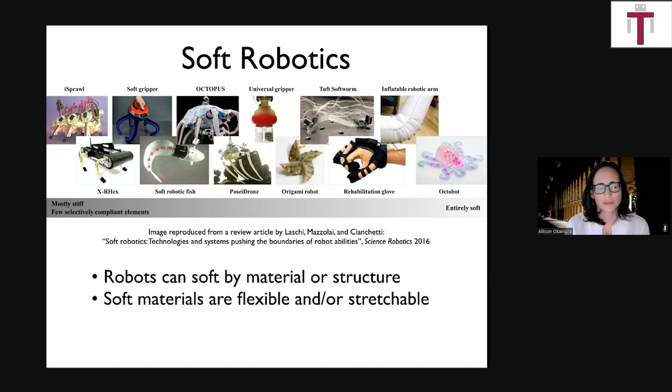Many of the robots shown in these images are made of elastomeric materials, which are highly stretchable, 300% or higher strain. But you can also have robots that are effectively made soft by their structure—long and thin, or having soft joints in specific locations. This gives a design space that is quite varied and complex to consider.

Another point is that soft materials can be flexible and/or stretchable. You can have materials that are quite flexible and bendable but don't stretch, and in fact most of the materials I'll be discussing today are in this class, whereas many soft robots are made out of stretchable elastomeric materials.

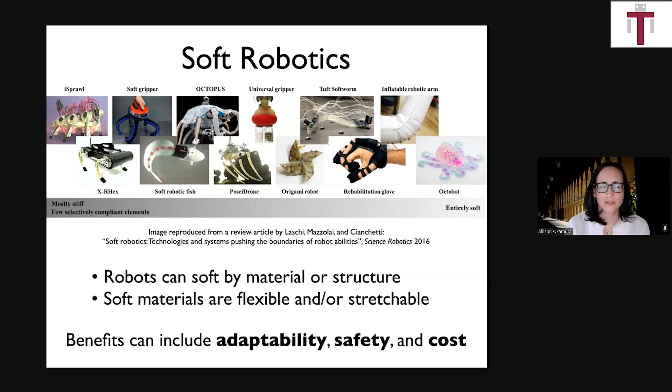The reason we'd like robots to have these soft features is adaptability to the environment—we get a lot of inspiration from biological systems, from plants to animals. There's also the potential for safety when interacting with people: a soft robot might be lighter weight, have lower inertia upon contact, and fewer sharp edges. Finally, though not always true, there's potential to reduce cost, which also relates to issues of accessibility I'll discuss at the end.

When we look at the advantages of hard versus soft robots and their fundamental structures—there are many types, but let's consider a traditional serial chain manipulator. In a hard robot, you have localized joints that can swing quite a bit in various directions, but stiff members, the linkages.

Soft robots tend to be more of a continuum nature—they curve over a large space, which can give challenges achieving particular workspaces with their tips, but allow them to navigate environments perhaps in a more elegant and smooth way than a traditional hard robot.

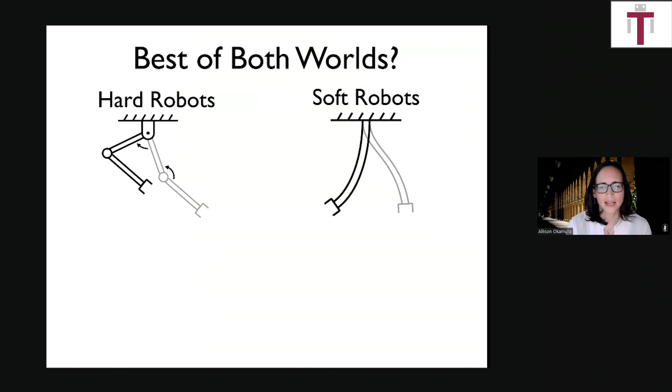The localized joints of hard robots allow sharp turns, letting them sometimes get to places a soft robot might not reach if it can't curve sharply at a particular location.

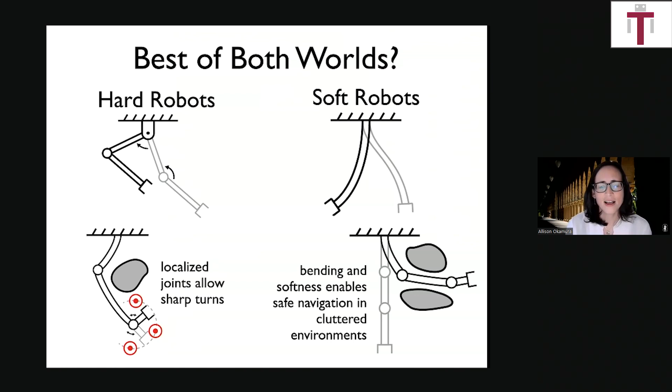On the other hand, the bending and softness of a soft robot allows navigation that is perhaps safer for both the robot and the environment when operating in cluttered areas.

Something I'd like to push towards the end of this talk, though not something we've fully achieved yet, is getting the best of both worlds by having soft continuum members along with localized joints where they're required. We're starting to see movement towards that in some more recent work.

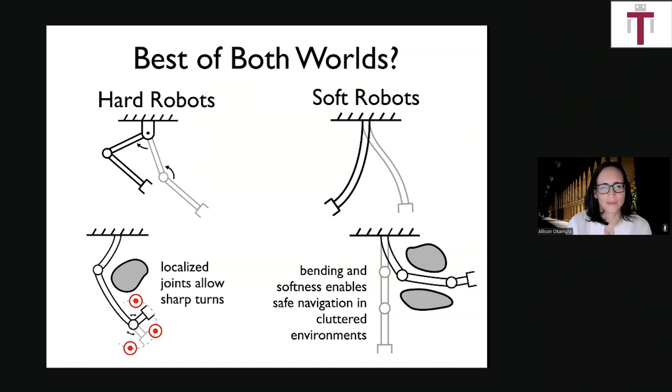The focus I'll have in the field of soft robotics is continuum robots. These are characterized by long, thin members and are typically associated with manipulation tasks.

There are many other types of soft robots, and many more continuum robots than what I've cited here, but this gives an example of the systems built by researchers all over the world to achieve this kind of continuum behavior.

Some of these are classical soft robots, while others actually incorporate joints and pneumatics.

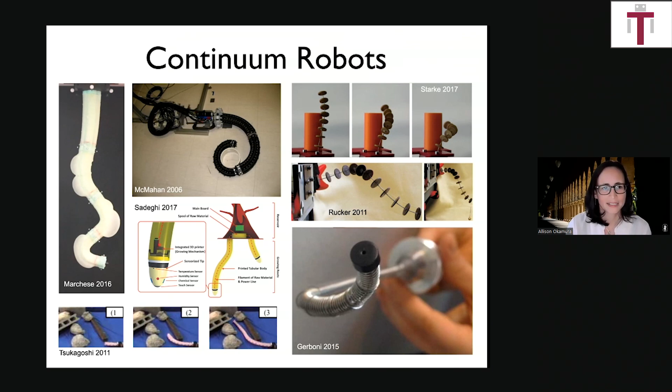The projects I'll discuss today—I'll pick out three in particular, and I'd like to think of them as a continuum of continuum robots. The continuums I'm talking about are, first of all, in material.

In these three projects, I'll look at devices where the material is inherently relatively stiff, versus two other examples where the material is relatively flexible.

We're also going to look at the ways these materials are used within a structure. In a case where the material is very stiff, the only way the robot becomes soft is through the structure and shape allowing it to be flexible.

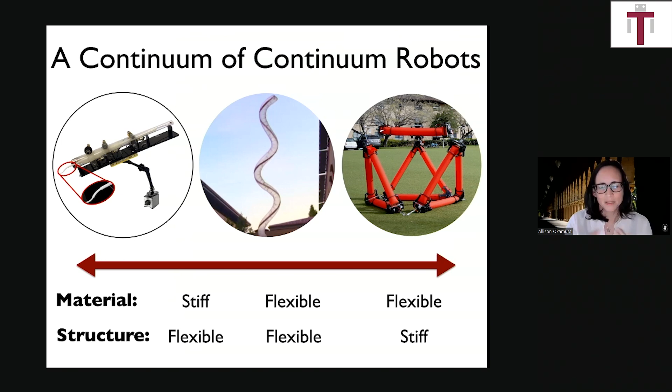You can also have robots like the middle example, where both the material and structure are flexible, and cases where, although the low-level material might be flexible, it's arranged in a relatively stiff structure. All these examples will hopefully illuminate the advantages of soft and hard along the way.

I'm going to start with a project that's a few years old now, but I think provides nice context for this area of work: soft, steerable, patient-specific medical robots.

The motivation for this type of research, thinking about the humanitarian aspects, how do we actually create soft robots that are useful for people, is that we can compare this to existing clinical devices, such as this teleoperated Da Vinci surgical system, which is useful in many medical procedures, but you could consider it to be a template surgical system.

In that you have a relatively limited set of tools and instruments, and much of the way the operation is done has to be adapted to the robot. A humanitarian challenge for these types of systems is that there are many marginalized patient populations that cannot actually take advantage of these kinds of robots. Examples are children whose anatomy is quite different from that for which the robot was designed, as well as obese patients or other patients with comorbidities, where access actually requires more adaptability and flexibility than what traditional robotic manipulators allow.

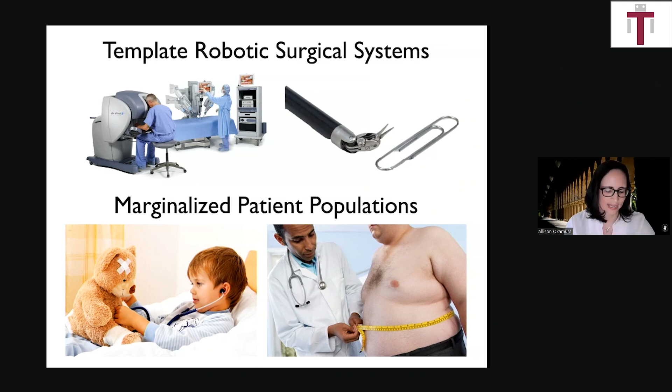So in order to think about making this more patient-specific design, how do you make a personalized robot for someone who needs to have a surgery? We start with the person.

And the data I'll show in these examples actually comes from a 9-year-old boy who had a kidney stone. This particular picture is actually my own 9-year-old son, not the patient from which the data was taken. In this picture, he's doing his favorite shelter-in-place activity, which is playing Minecraft on the iPad. We're working on that. But what I wanted to communicate here is that when it comes to medical robots, these are real surgeries on real people, although not in this particular case.

What you do when you start this kind of procedure is you perform a scan of the patient, in this case, a CT scan that identifies the location of the lesion, or in this case, a kidney stone. And then you can develop a 3D model of that specific patient.

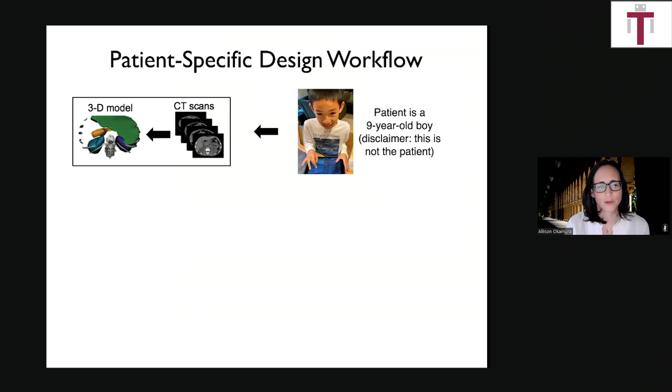And these images may look different from ones that you have seen before, because most of the images you see in the past are probably from adults, whereas this one is from a 9-year-old boy for whom a Da Vinci surgery wouldn't have been the right size.

And then what we're interested in is having this data, this amazing information from the images of the patient, in order to go through a design process. And in that design process, the surgeon now becomes a designer of the patient-specific robot that we would like to use. So this is an interesting thing for me as a mechanical engineer.

I think if you were a mechanical engineer several decades ago, you would probably know very well how to fix your car. I frankly don't know how to fix my car, in large part because cars are so electronically controlled that they are closed off to the user, even to an expert. It requires very specialized knowledge and equipment in order to do anything with a car these days.

So in the same sense, surgeons are now cut out from the design process of the surgical instruments that they use. And so we would like to bring the surgeon back into the design loop and give them the tools to do that. And this is something that we can do in a patient-specific design workflow.

Once the surgeon, and I'll talk more in a minute about how this is accomplished, but once the surgeon has come up with their desired design, we fabricate the components of this relatively soft robot, and then we drive it using a robotic base that can be used to control the device as it goes into the patient. So let's talk about some of these components.

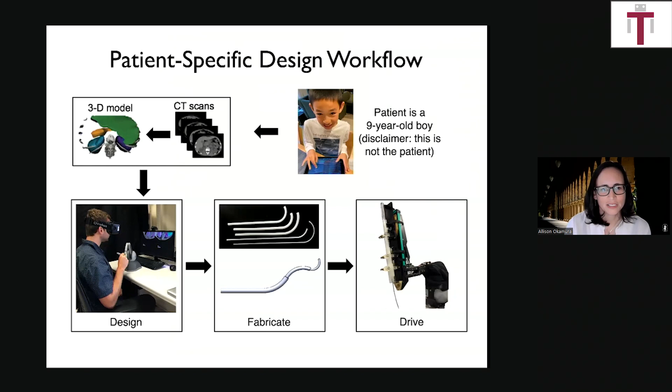First, I think it's important to discuss the type of robot itself. You could probably go through this process with many different types of robots, but what we've used are concentric tube robots. The images here are shown using nitinol, which is not being used for its shape memory alloy properties, but rather because of its super elasticity. And that is the nature of softness in this system.

This super elasticity allows these pre-curved tubes to be inserted and spun with respect to each other in order to create this tentacle-like behavior that you can hopefully see in this video, although I'm sure it's a bit choppy over Zoom. Now, in this kind of system, I should note that it was inspired by previous work on steerable needles.

Which were designed to go through tissue. In this case, concentric tube robots are designed to go through lumens or work in open space. And there's been pioneering work on this type of robot from Bob Webster and people from Pierre Dupont's group and many others as well. So given this type of robot,

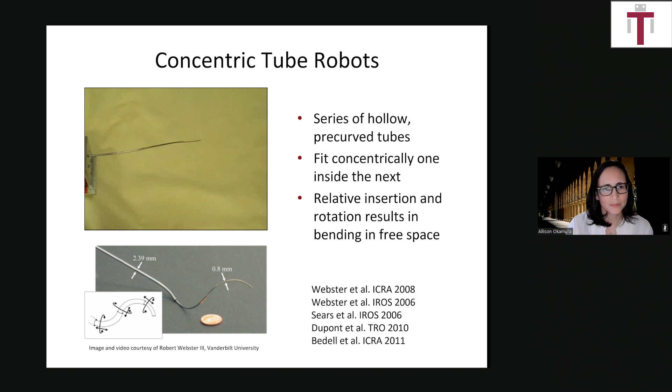We have this design process that I mentioned allows the surgeon to be in the loop.

My former PhD student, Tania Morimoto, is demonstrating selecting a set of points where she would like her continuum robot to go. The concentric tube robot is automatically designed using some somewhat complex kinematics, given that the bending of this robot occurs through material interactions of the various tubes. She's demonstrating how it can be moved around.

Normally in this design process, Tania would be designing the robot inside the 3D model of the patient, but in a 2D video presenting to other people, it's really hard to have situational awareness. So here she's designing the robot and checking it outside of the virtual patient body.

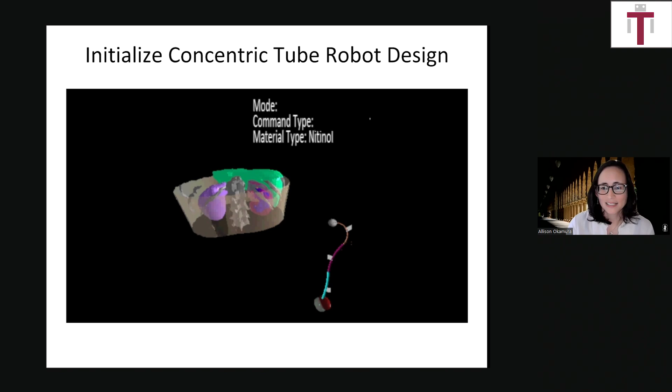Once that design is initialized, it can be optimized either through manipulation by the clinician themselves or by an automated system. This is actually a choice of the amount of automation versus human-controlled design. You can simulate the robot afterwards and make sure that it's not moving and hitting, for example, soft tissues that you don't want it to make contact with.

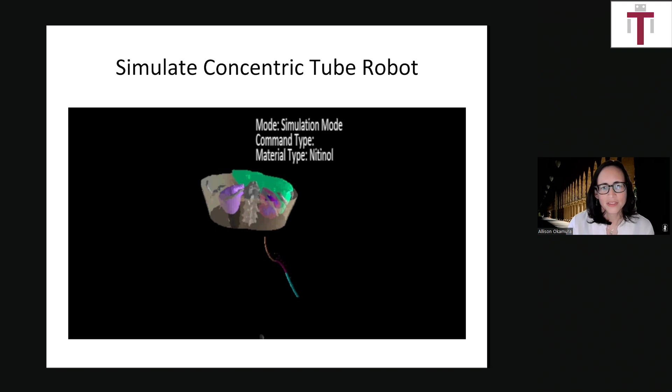After this process, we've designed and tested this with people in the lab, but it's really critical that clinicians can use it. This is one of our clinician collaborators, Dr. Hsieh, who is a pediatric urologist who actually got us the scans of the patient, the 9-year-old boy that we were trying to design the robot for.

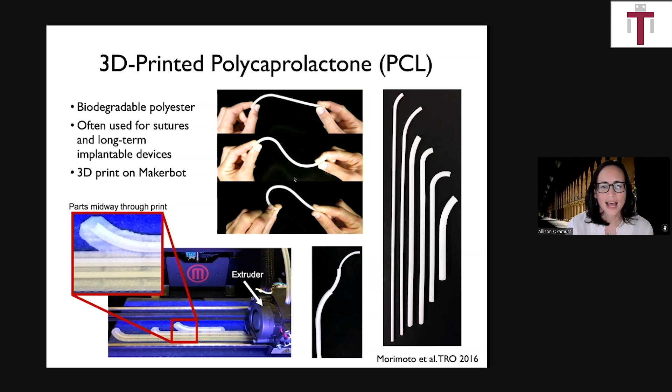Once that happens, it can be integrated into an actuation system. In this case, we took advantage of the flexibility of 3D printing to create a somewhat novel waffle gear approach to insertion and spinning of each of the 3 tubes, and demonstrated that you can make this compact, lightweight system handheld, mounted on the base of another surgical robot like a Da Vinci teleoperated robot, and that you can reach targets within a few millimeters, even without closed loop control.

This is with open loop, just using the kinematic models applied to these concentric tubes. In practice, it's unlikely that the system would be run autonomously. It's going to be teleoperated for safety, much as current teleoperated surgical robots are done.

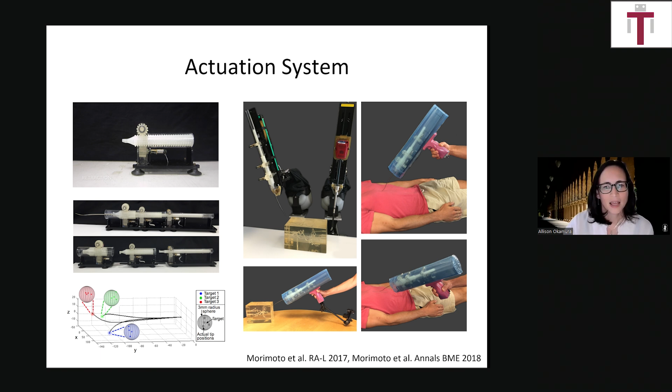So what we've been able to do is not yet apply this to patients, that is still coming, but we've actually effectively 3D printed a 9-year-old boy patient at the relevant organs based on the models that we had originally. So we can identify various components like the liver, the kidney itself, and the tumor located in the kidney. We can model this, as well as the obstacles we have to go around, like other organs and the ribs in this case.

What we can do is use an off-the-shelf haptic device as a master manipulator, and we can control the different degrees of freedom. I won't be talking about it much here, although an important future work for soft robots and ongoing in many research groups is how do you control the many degrees of freedom of such a robot, and what is the right human interface if you want to teleoperate it. In this case, we had various tubes and buttons that are actually akin to many surgical robots used today. So we've been able to demonstrate this in terms of going around different obstacles and reaching targets.

But as you can see, due to the nature of this robot, going back to my point earlier about not being able to make sharp turns, this type of concentric tube robot, while being very thin because the actuators are all off board at the base, so what goes into the patient is very small, we still have this limitation that we cannot make very sharp turns, and that actually creates some limitations to its possible workspace, as you can imagine.

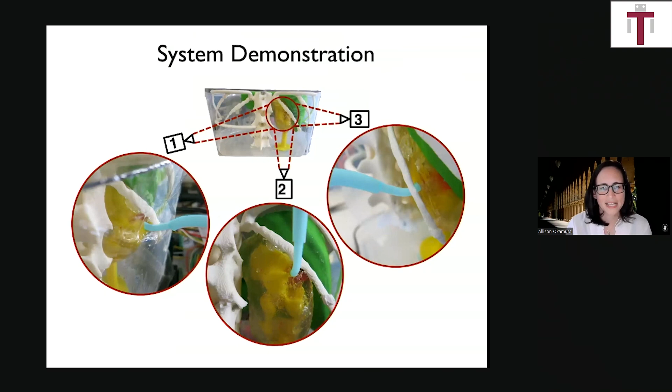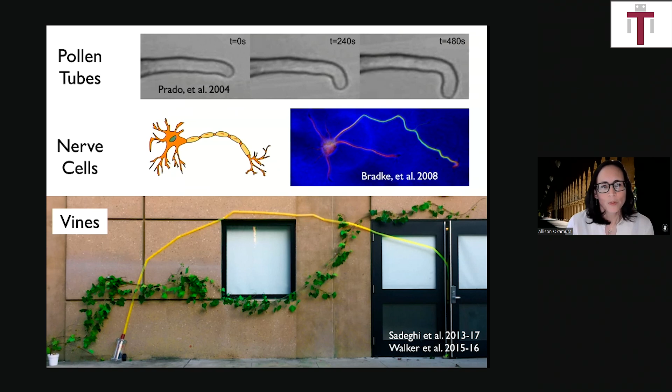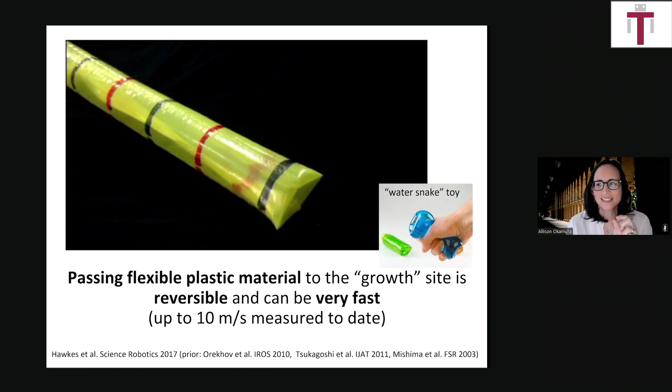One way to extend the tip of something and have it still be a soft robot is through a process called eversion. In this video, you can see we have a soft plastic material, akin to a Ziploc bag, formed in the shape of a tube. New material is fed through the center, which everts or flips inside out at the tip in order to lengthen.

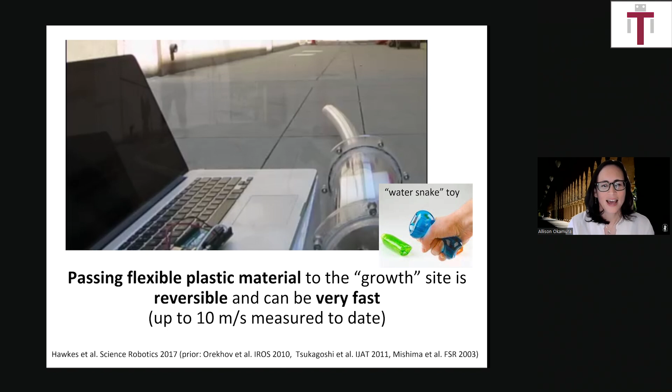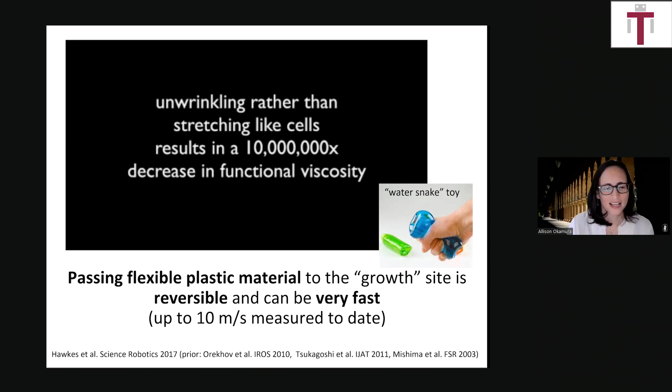If you're having trouble picturing how this works, perhaps you've played with a water snake toy—these are basically elongated toroids. Some people have made robots like these toys; I think Mark Yim, who's a guest panelist today, has made such robots. In our case, rather than making a toroid, we want to grow ours as long as possible, so we keep extending the tip rather than having it flip back to the base. This growth can happen extremely fast.

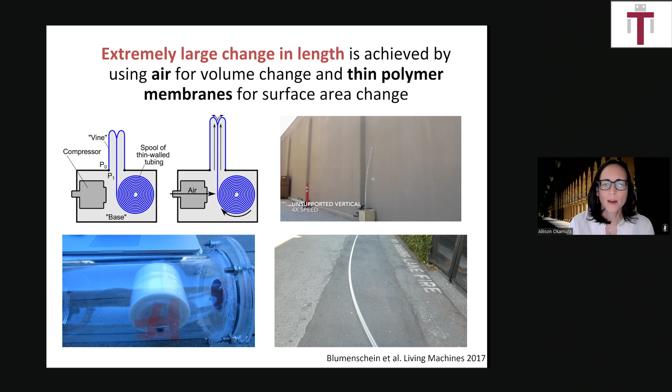Here are a few more videos demonstrating how this is achieved in a deployable system. You can create a spool of this thin-walled plastic material in a tubular shape, put it in a pressurized air chamber, flip over the top in an eversion, and then apply air pressure, which causes it to grow. This creates unsupported vertical growth, as shown in the top right video, until eventually it buckles and falls over. It's a pretty amazing extension given the softness of the material.

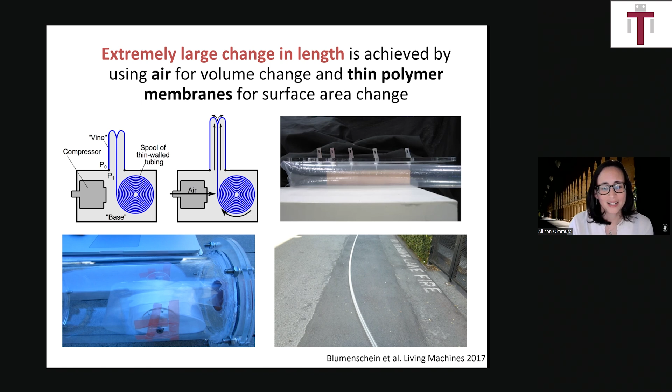It's also possible because it's somewhat lightweight. When it's on the ground, it can keep going until you basically run out of plastic, which is what happened in this case. Here we're seeing the spool unwinding from a very compact package at the base, and on the right, we're walking the path that the robot followed.

In this case, is it really a robot? It's really just a plastic bag filled with air that's being pressurized and going wherever it wants to go, following the favorite moniker of soft roboticists: embodied intelligence. But hopefully you can see in this video that it has managed to snake its way through interesting obstacles, such as a series of pipes coming up, simply by bouncing off obstacles in the environment and continuing to want to grow.

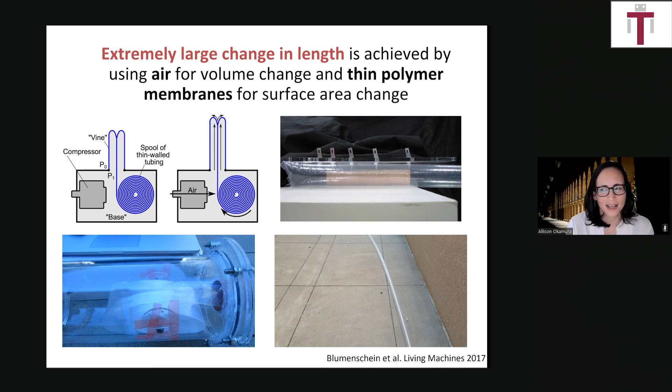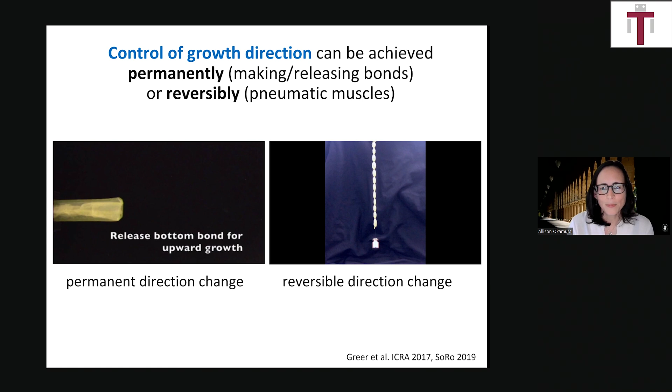So how do we make it a robot if this is simply a plastic bag filled with air? You need to be able to steer it. Controlling the direction of growth can be done using many different mechanisms. Our group and other research groups have tested various mechanisms, and some are permanent, which can be more efficient in terms of space and weight. But for the most part, you'd like reversible direction change.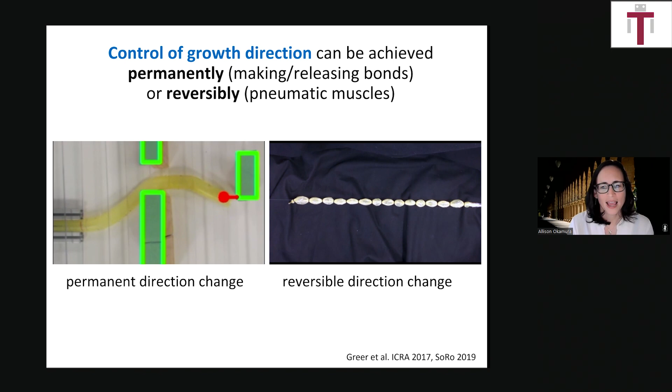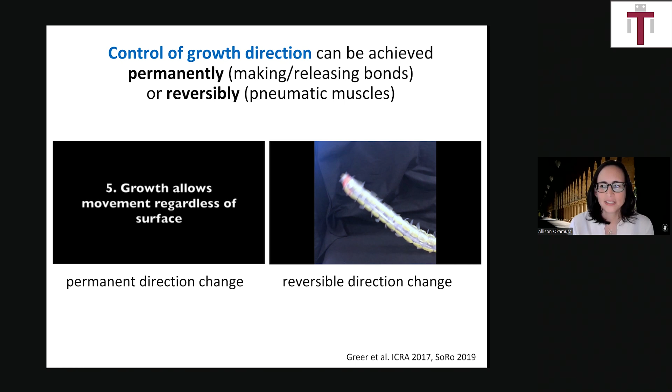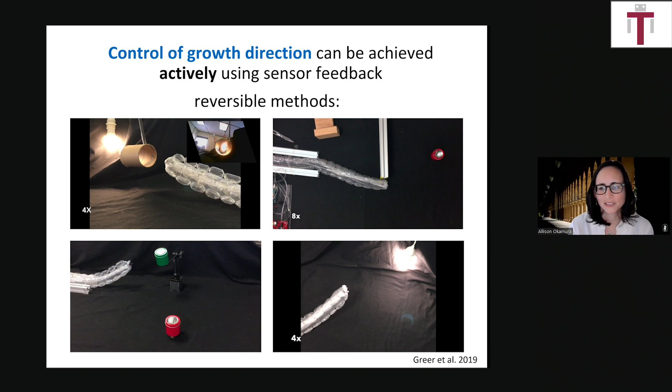For that, we've built on some work done at MIT with pouch motors, and we've created series pouch motors, now mounted along the side of the robot, acting like pneumatic tendons to shorten the length along certain sides of the robot. This is reversible, and it's also a soft actuator so it doesn't impede the eversion process, and the robot can still grow. Combining pneumatic actuation for steering with growth gives you this powerful ability to reach targets in your workspace—in what some people seem to think is a pretty creepy pseudo-biological behavior.

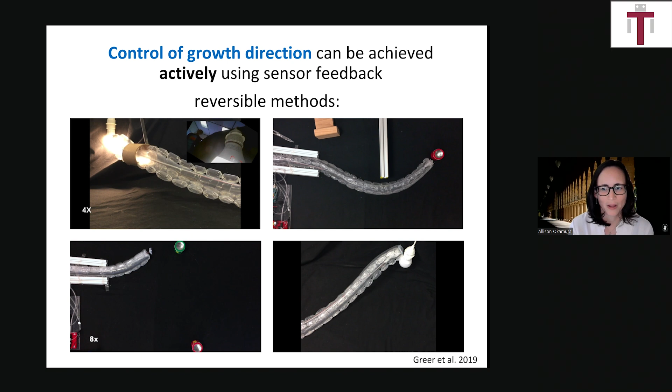All of the videos shown here are actually autonomously controlled based on a camera mounted on the tip of the robot, although, as you'll see shortly, such robots can also be teleoperated. For many humanitarian purposes, we'll want to teleoperate the robot, because we don't yet have the situational awareness to fully control a soft-bodied robot in many environments.

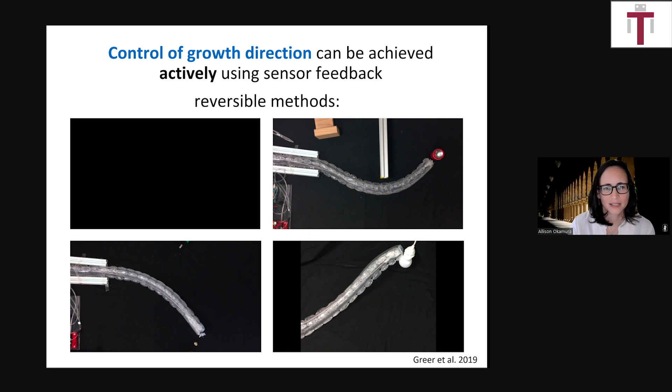I want to point out that this pneumatic actuation method with series pouch motors is not the only way to control growth direction or steer it. Another is through tendon routing, which has advantages in terms of larger forces and achieving larger curvatures. We need sharper turns in our soft robots to reach a desired workspace. While these aren't 90-degree turns, it's a much tighter turn than what we can achieve with a typical pneumatic actuator. If anyone's interested in how we've used these actuation types to make antennas that change shape, there's an RAL paper with a presentation at ICRA from my postdoc, Laura Blumenschein.

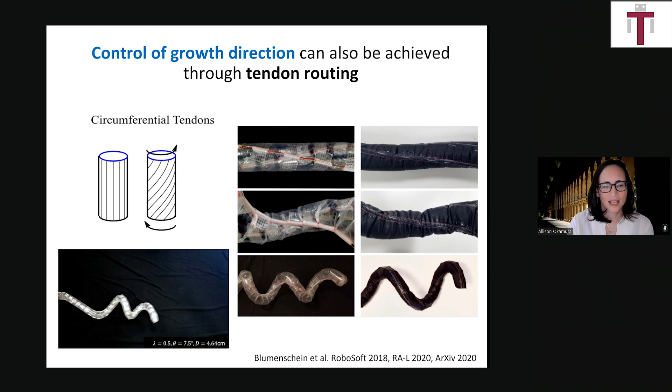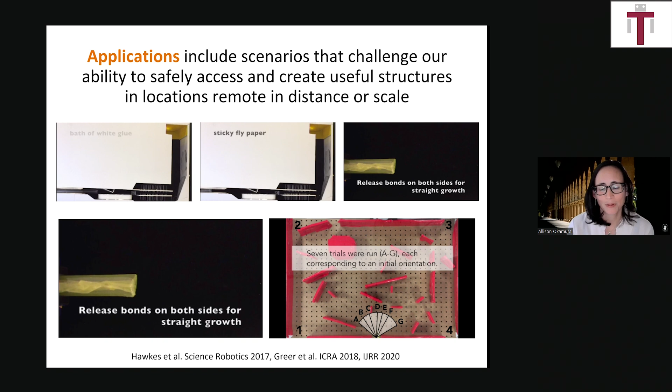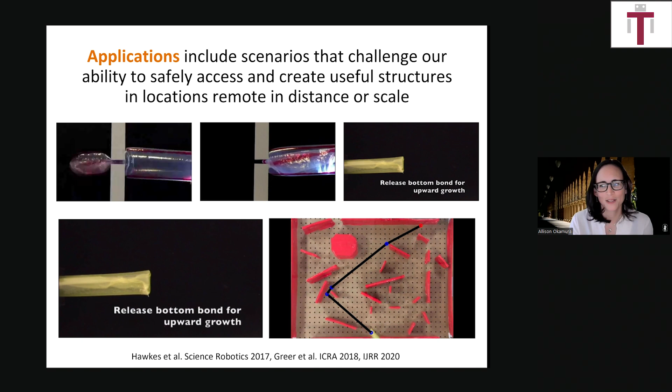So what are the applications? The most exciting thing for me about this project, although I get pretty geeked about the mechanism being interesting, is that there are some really interesting applications. These robots can get into places where even many other soft robots can't go. They can go through rough environments and even be punctured, but still keep going because the material doesn't slide with respect to whatever poked it, so it effectively fills the hole and doesn't leak too much. You can also do things like deliver sensors through the tip.

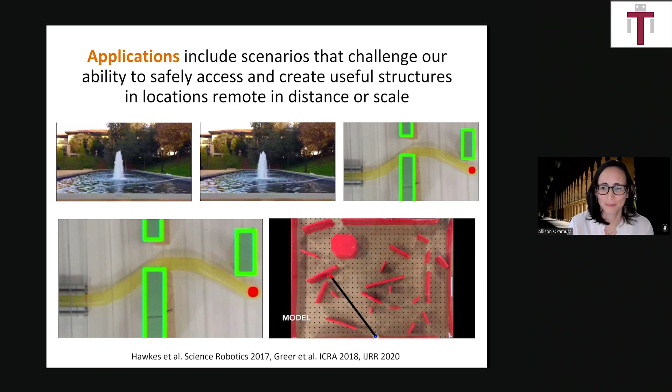One of my favorites is the video on the upper right, which is our firefighting version of the robot. Remember that these robots are extremely cheap—they're basically plastic bags filled with air. So if you'd like to fight fire with it, you can put a mix of water and air inside, pressurize it, and the fire will melt the plastic so the water and air come out at the desired location.

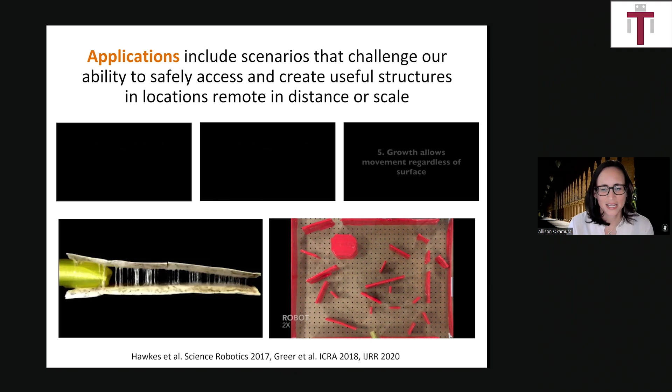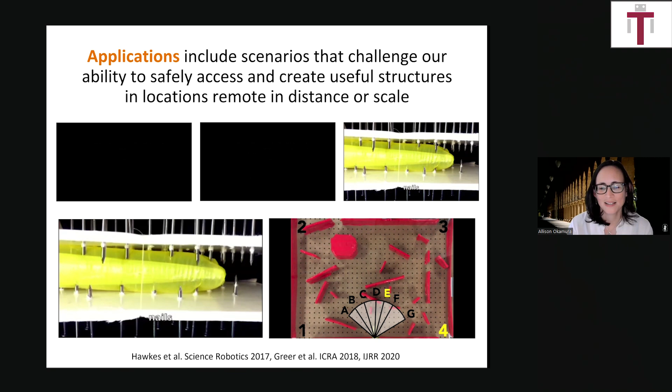All of the examples on this slide are pre-formed robots. That is, we've used tape to shorten the plastic in certain areas to achieve some desired shape based on what we know about the environment. That's also the case in the lower left video, where we're doing a simple manipulation task of growing around a valve and then pulling from the base in order to turn it.

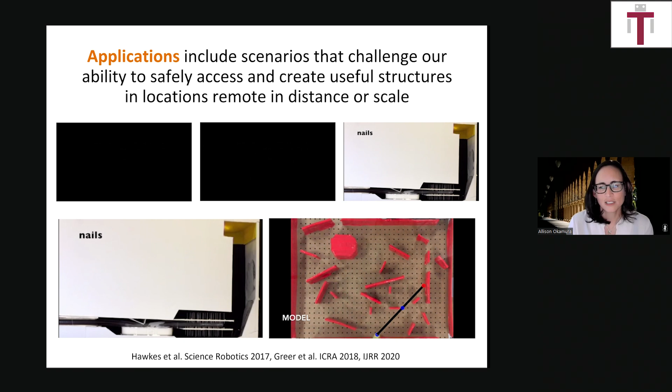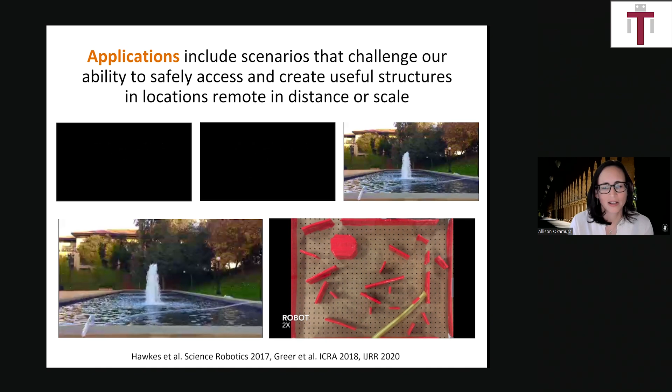One exciting thing here is that despite being a soft robot—soft in terms of flexibility, so it bends easily—it's not actually stretchable. You can pull from the base and the robot is quite strong in tension, maybe even stronger if you run a string through the center. Because of that, we're enabled to do this kind of remote manipulation task.

The last point, shown in the video on the lower right, is that you can also use obstacles in the environment to help you turn. If you're aware of the environment and can do some planning, the robot can take advantage of its softness—this embodied intelligence—to achieve its goal with very minimal actuation.

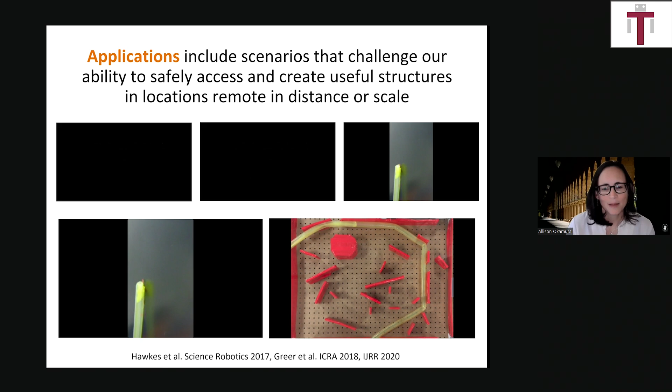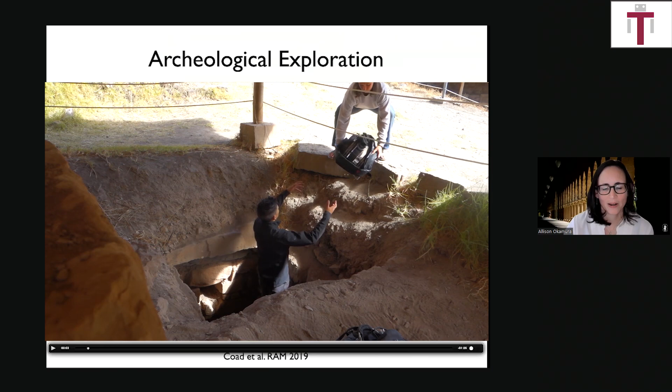Those are all exciting applications, many of which we think could benefit humanity in things like search and rescue, as well as medicine. I should note that medical applications are being explored by Elliot Hawkes at UC Santa Barbara and Tania Morimoto at UC San Diego.

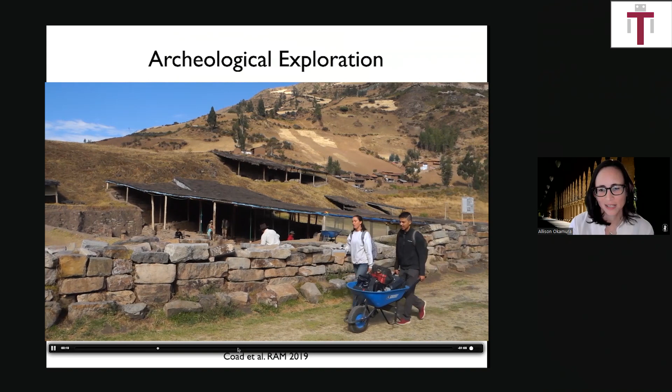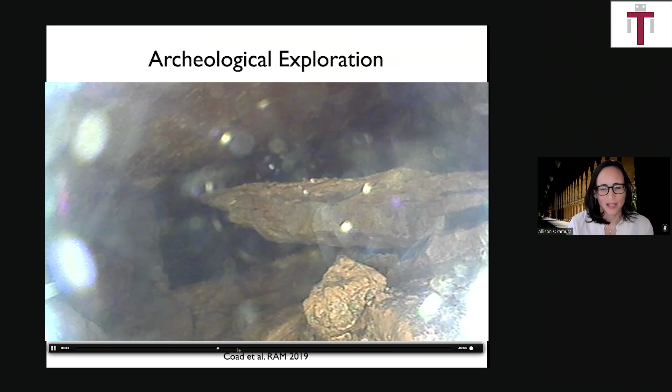The other application where we put this into practice has been archaeological exploration. This is something my student Margaret Coad did, where she took the soft growing robot to an archaeological site in Chavin in Peru and was able to teleoperate it into very small tunnels which were previously almost impossible to get into. This allows you to take images and even retrieve artifacts in locations that were not previously accessible.

So all of these examples I've given so far are mostly about navigation, and I had one very simple manipulation task. But in order to be useful for people, we really need to think about how manipulators can be formed from these types of soft robots. One of the challenges that's probably obvious by now is that it's not very strong in bending. So my student Brian Do has developed jamming techniques, layer jamming, that helps keep the robot stiff where desired.

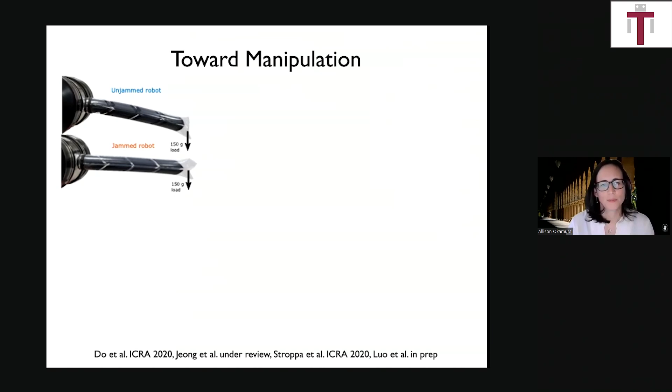A jammed robot can be made straight if desired, compared to an unjammed robot that will bend. The other cool thing about this jamming technique, or really any technique that allows you to selectively make parts of the robot more stiff versus more soft, is that you can start to achieve these sharper turns that I mentioned earlier were desirable.

So for example, if you start with a long robot that has a tendon pulling on one side or both sides, you can unstiffen a particular area of the robot, pull on that tendon, and it will effectively turn or buckle at the point where you unstiffened it.

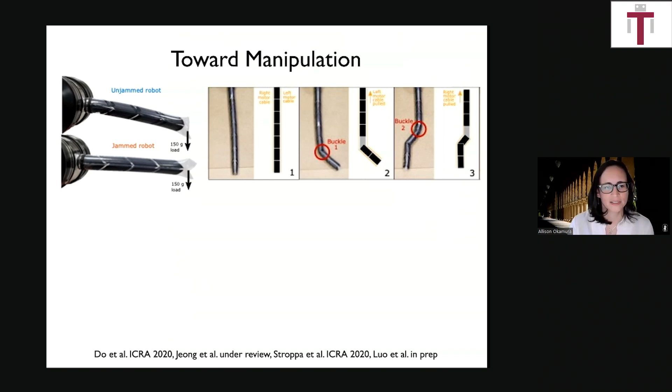Then you can re-stiffen it, pull on a different tendon, and buckle it at a different point. Therefore, you can start to get these movable, placeable joints on the robot that give you some of the dexterity you see in traditional hard robots, while still maintaining the soft robot behaviors we're seeking.

Now, eventually, what we would really like to do is real manipulation - that is, be able to pick up objects and move them around. You could even extend this to in-hand manipulation if you imagine multiple of these robots. At this point, we're nowhere near making these complex systems quite that small. But this involves adding grippers to the end effector, and being able to control curvature versus straightness where we want to.

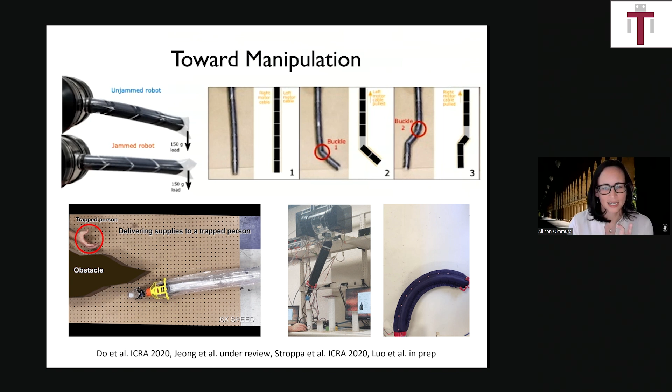A couple of these are very recent works, one presented recently at ICRA and others under review. So this is how we're starting to get towards manipulation, and even being able to control the shape with more fidelity than has been achievable previously.

So all of this is pretty exciting, but one of the things I'm most excited about now is work that was very recently published about shape-changing robots that are in a truss form factor. And this word, isoperimetric - I'll explain what I mean by that very shortly.

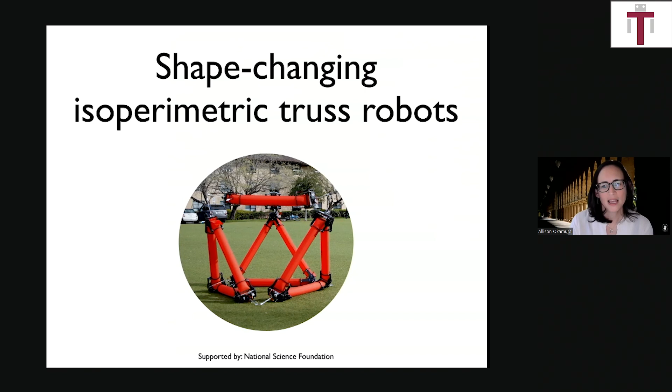So these types of robots are inflated beam robots, just like the Vine robots I showed earlier. The inflated beam is the underlying component. But now we are putting this into a truss form factor, and trusses have certain advantages.

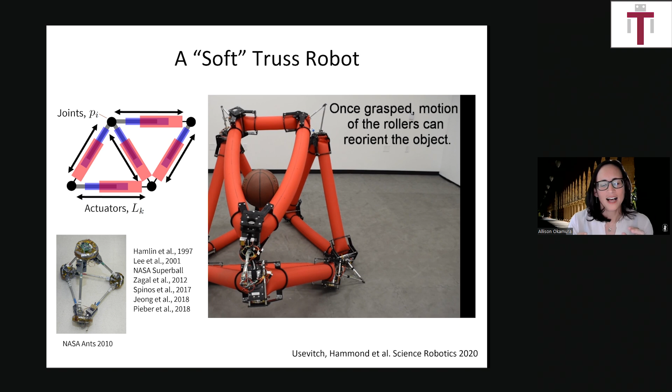This is just a small sampling of prior work done on truss robots, but the traditional truss robot is based on the idea that you have joints connected by members that extend their length. The difference for our soft growing truss robot - whose video is extremely jumpy, so you're probably not seeing it move much - is that these members don't actually change in length. Let's see if we can explain that better on the next slide.

One of the key goals for creating a robot that will serve humanitarian purposes and move around in our environment is that we do have to remove the tether of the pneumatic system. So many examples of soft robots, ranging from plastic ones to deformable ones, all have these tethers going to the pneumatic actuator base - for example, a compressor. This is something we would like to avoid.

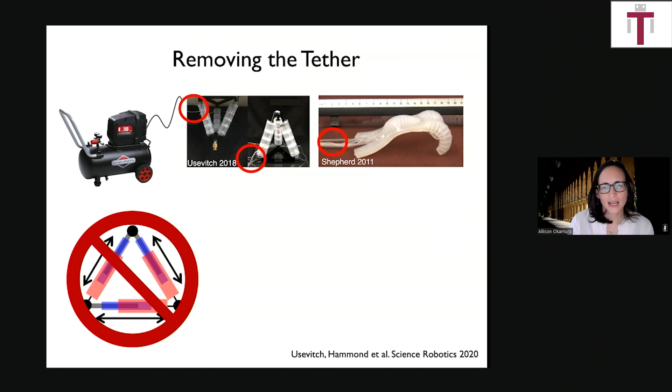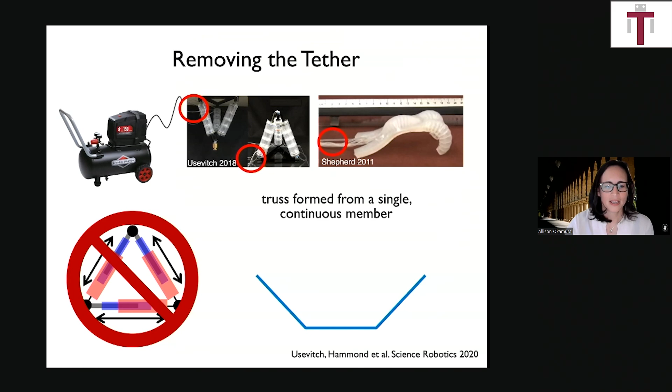So rather than extending the members, which requires additional pneumatic pressure - more volume of air, because air is compressible - we have an approach where we form a truss from a single continuous member: one inflated beam that we bend together. Instead of trying to actually extend the different lengths of the members, we take a point which forms a joint and we move that joint around. That's the fundamental insight - we make the joints move relative to the structure so that you can have a constant volume, constant perimeter inflated beam, and that's where the term isoperimetric comes from.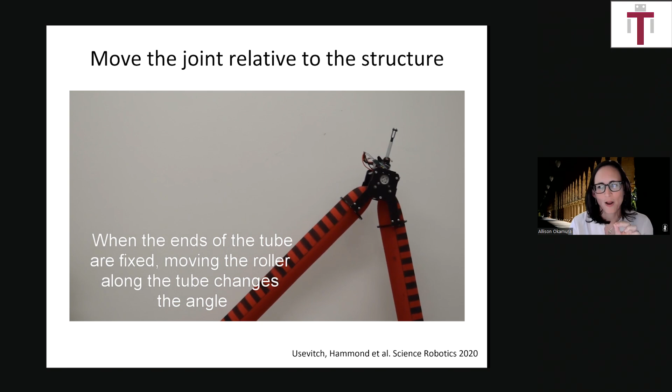So in these cases, you have this joint which can slide back and forth and move relative to the structure.

This isoperimetric robot is called that because the per here is not with an A, it's with an E, referring to the word perimeter. The idea is that the perimeter of one of these inflated beams remains constant, and the volume of air in the beam also remains constant. This allows it to change shape significantly just by moving the joints, without having to tether it and get additional air pressure.

Let me go through the different components. There's an inflated fabric tube, in this case several attached together. We have roller modules which create movable joints. This is what I referred to earlier about being able to take a soft robot and give it sharp turns. These roller modules are allowing that.

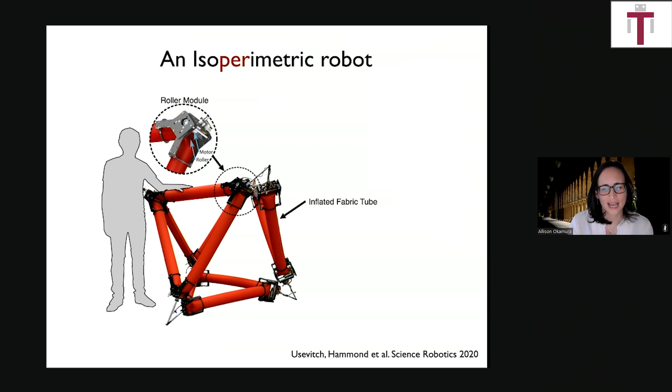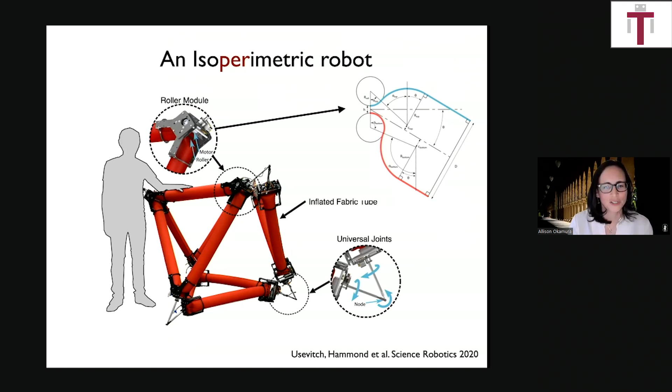In addition, we need universal joints that connect the different tubes together to get a truss-like shape. A last point is that making these roller modules is not trivial. Conceptually it's very straightforward, but making it happen in the real world requires a lot of analysis and careful experimentation to figure out how you can travel over the tube with a reasonable amount of friction.

So locomotion-wise, this truss robot can do it while untethered, which is pretty exciting. It's not the fastest robot you've ever seen, but it does allow itself to turn and rotate given the different changes in the locations of the roller modules.

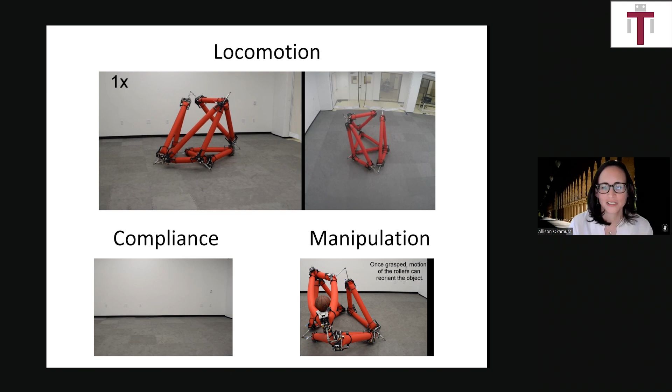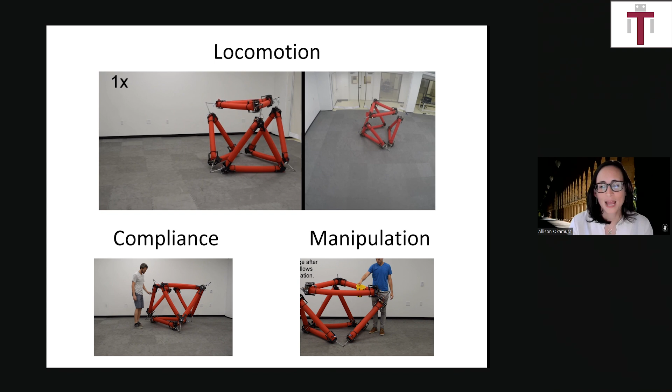We also have some compliance of the overall system because the different members are inflated beams. They are somewhat soft. That said, in order for the whole device to have the structure it needs to maintain a truss, they're inflated to relatively high pressure, compared to our growing soft robots, which might just be 1 or 2 psi. In this case, you need tens or possibly even hundreds of pounds per square inch.

Yet still, the robot is overall quite safe. A person can even sit inside of it and jump on top of it, as has been demonstrated by our students. The robot itself can also use its softness to help it pick up and grasp and even do a kind of in-hand manipulation of objects, as we've shown with a basketball.

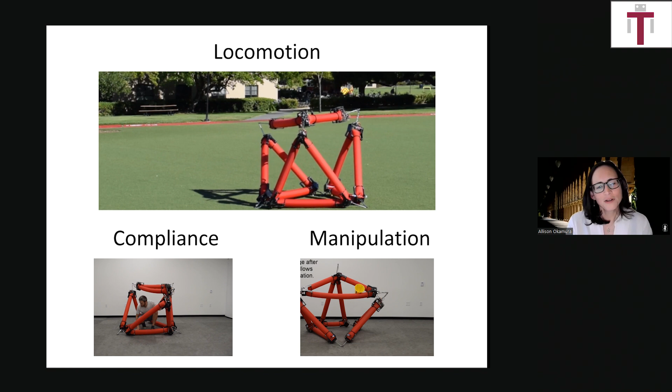Another cool thing about this type of robot, if you think of the joints as something you can attach onto any inflated beams, is a sense of modularity. You could take a 3D triangle truss robot and turn it into a planar type of truss robot, as shown on the left, or use just one big beam, as shown on the right, and it can change size and shape depending on how you've mounted and connected the various roller modules. That's pretty exciting.

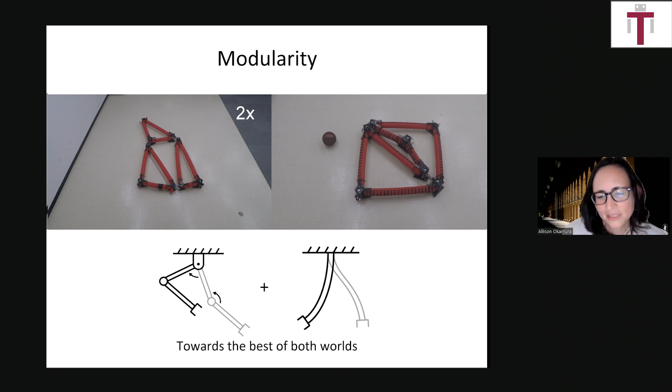So what we're getting towards here is the best of both worlds, a robot that has some inherent underlying softness, but one that has these sharp joints that give it effectively some more dexterity, like that which traditional robots have.

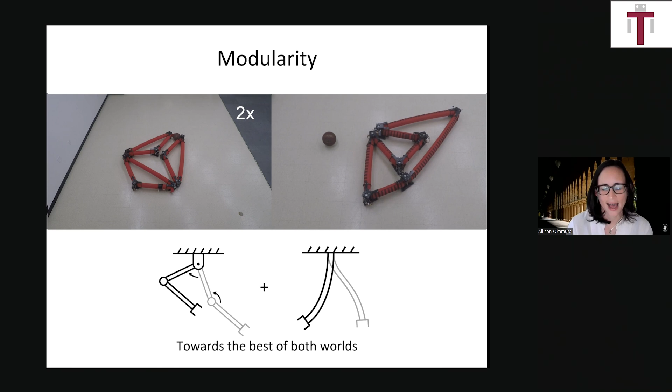So these are three types of soft robots or continuum robots, again with various properties of hardness and softness and their ability to create joints. The applications for the first two I touched on quite a bit, the first one being patient-specific medical robots, the other one being a wide range of things ranging from manipulation to search and rescue.

The truss robot is going to have applications in exploration, possibly even in space on other planets. It has the advantage that when you deflate it, it becomes very small and relatively lightweight compared to other robots its size, but it can be expanded to fill up a large space.

But that said, all of these systems, while showing initial promise, still require a lot of work to become something that will truly help humanity. So I think this is a call for not just roboticists everywhere, as this is constantly a challenge, but soft roboticists to think about how these systems actually evolve into something that can be practically used by human beings.